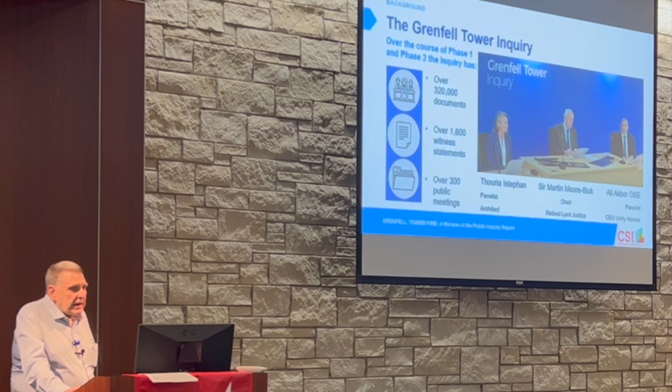Almost immediately after the fire, the government created the Grenfell Tower inquiry to examine the circumstances leading up to and surrounding the fire. It was led by a retired Lord Justice. This is kind of an equivalent to maybe one of the lower federal courts that feed into the Supreme Court, so Sir Martin had a pretty responsible job. There was an architect panelist, and there was a panelist who headed up an organization that managed public housing. So in addition to the comprehensive document discovery, the panel received witness testimony from everybody involved: the contractors, the manufacturers, the designers, the suppliers, local authorities responsible for the day-to-day management of the building, the government agencies, and most poignantly, the survivors of the fire.

Almost every survivor of the fire gave an individual testimony of what they experienced. The inquiry's stated goal was to answer the question: how could such a thing happen in a modern building in a technologically advanced country?

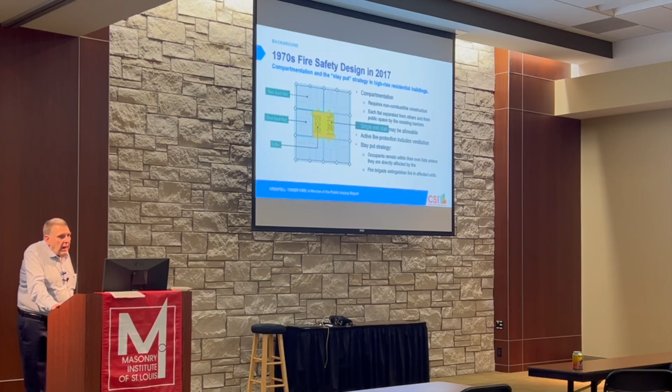So when the fire occurs, all residents not directly affected by the fire are urged to stay put. If you're not on the floor the fire's on, you are essentially in a fire safe box, right? And you stay put until the fire brigade extinguishes the fire or determines that it has spread to the point where you're in danger and need to get out.

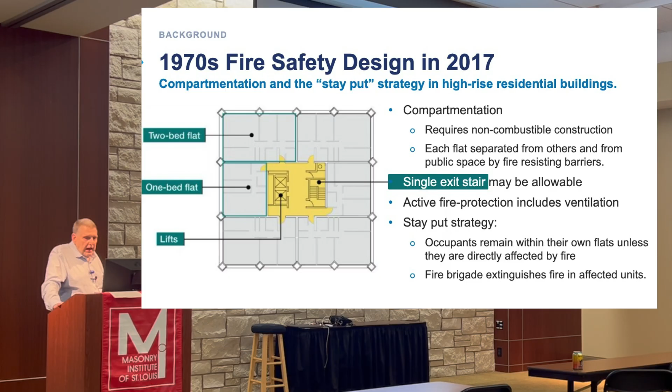Since there was no large-scale evacuation, firefighters were unhindered in using the stairs to move about the building. And you'll notice there's only one stair. Looking at it from our modern eyes, we say, well, how can a one-stair, one-exit building be safe?

After looking into this, I'm convinced that it actually worked. And one of the reasons I'm convinced is that there were hundreds or thousands of these buildings in the UK. And prior to 2000, which was the latest date I could find, there were no fatalities reported attributable to stay put.

Does anyone want to guess how many fires the London Fire Brigade fought in residential public housing units in London in the 12 months prior to the Grenfell fire? Make a guess. None? One. 12,000. London Fire Brigade answered 1,000 calls a month. Thank God the math was easy so I could figure this out, right?

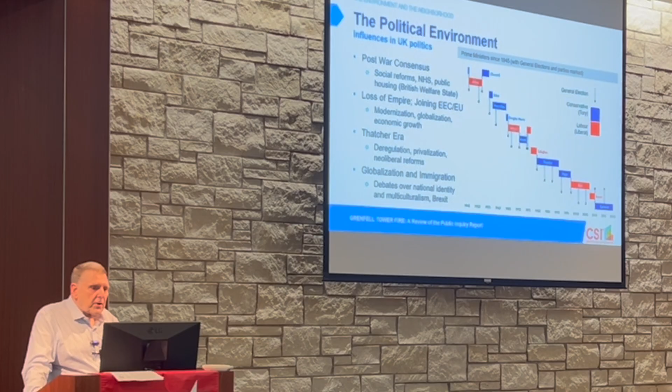This is a chart of politics in England after World War II up until 2020. And I'll point out that we do it backwards here. In our world, blue is our Liberal Party, red is our Conservative Party. The rest of the world does it the other way. So when you see red, you're seeing the Liberal Party. When you're seeing blue, you're seeing the Conservative Party.

So after World War II ended, Churchill was voted out, and the Labour Party came in. And there was a big push in England to rebuild and to provide housing, education, health, and welfare for the well-being of all citizens. This is where you had the big social welfare state develop.

The loss of the empire had been going on for a few centuries. We actually started it here, right? Didn't we, in 1776? I think we were the first of the colonies to sort of say we don't want to be under England anymore. And it had been accelerating, and after World War II, it really started going.

So this Imperial England is winding down, and England turns to a revitalized Europe in the years after World War II as a trading partner. When Maggie Thatcher comes in, in 1979, she brought along neoliberal reforms and austerity movement, and she privatized a lot of what was going on. Her policies reshaped British politics and ended the post-war consensus.

For the last 2 decades after Thatcher, the political debate in the UK, like other parts of the world, has been more contentious, and it's centered on immigration, nationalization, and Brexit.

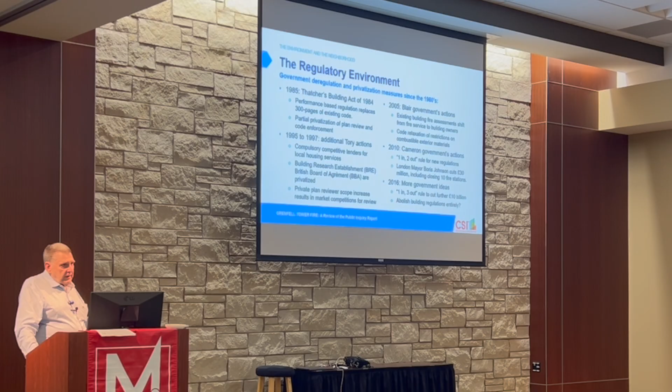This directly affected the regulatory environment. Thatcher had the Building Act passed in 1984. Building codes are now called approved documents. Requirements are replaced with the word guidance, so builders and architects are given guidance. Private code consultants are allowed to compete with local authorities economically to review and approve construction documents.

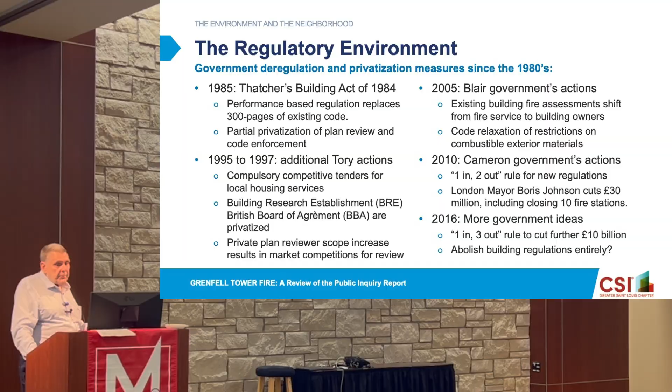So if you're an owner or an architect, you have your choice. You can go to the county government or the council government plan reviewer, or you can hire a private consultant. And even when the Labour Party gets back in with Tony Blair, it's not a reversal. Tony Blair is not a particularly liberal person, right? He's carrying on much of the same stuff.

He's relaxing the restrictions on combustible exteriors. He's allowing building fire assessments instead of being done by the fire brigade. Now it's done by building owners. So you're doing your own assessment of fire safety for the buildings that you manage.

Blair introduces a one-in, one-out rule for Parliament—I should say Blair's government. So what that means is for every one new regulation you want to pass, you have to take one regulation out. As the Tories get back in, this becomes one in and two out, or one in and three out.

During this time, London Mayor Boris Johnson cut £30 million, including closing 10 fire stations in London, one of which was the North Kensington station, which literally was within walking distance from Grenfell Tower.

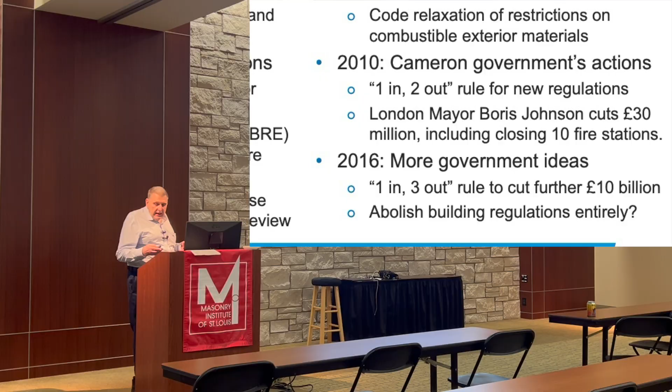And finally, a member of Parliament stood up on the floor of Parliament and said, are we at the point where we should entirely abolish building regulations? Essentially, let's get rid of the code. Well, that didn't pass, but that kind of gave you an idea of what was going on in this time frame. This is 2016. 2017 is when the fire happens.

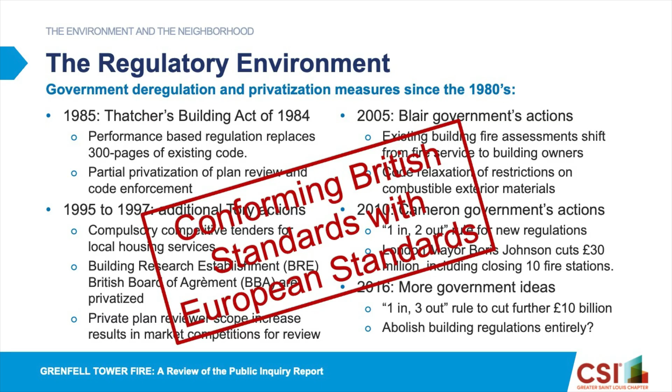While all of this is going on, this timeline, we have a UK that in the beginning is conforming with European Union standards, because don't forget they're becoming trade partners. The UK joins the EU. This goes on for a while, and toward the end of this time period, now we're facing Brexit. So all this work toward combining leads to thoughts of, well, do we really still need to do this? Should we separate our standards? A lot of confusion and so forth, right?

Actually, before I did this at the end of the slide, but I want to do it at the beginning, talking about the culture and the history of the UK. Anyone want to guess who the very model of a modern Major General is here? Sir Milton Grenfell? Very close. You always get them right. Actually, it is Field Marshal Francis Wallace Grenfell, the first Baron Grenfell.

The history of England is a history of contrast. There's an obvious pride in being the power, being the empire for many, many years, in the culture and the history, in advancing science. This also comes with a break between the classes. There's a lot of racism, and the whole sort of colonial approach is really a tarnish on the record of the English Empire. London becomes the seat of a great empire.

London is the greatest city in the world. Time starts in London, right? At Greenwich—that's where time starts. That's the kind of influence that London had. Even after the empire started to wane, the Industrial Revolution took place, and then you started to see a growth in banking, manufacturing, insurance, and so forth. And then later on, it's still in a very important location, attracting even today global talent and investment.

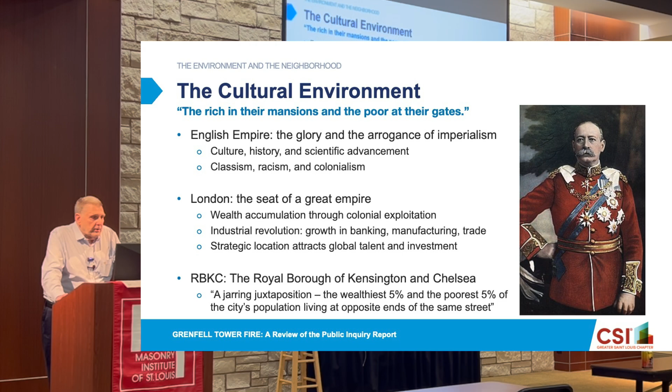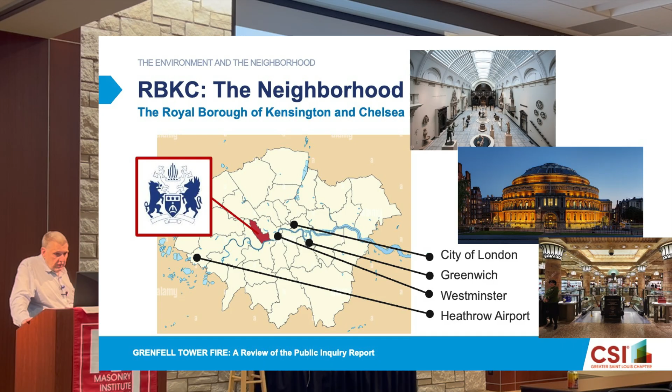So just to give you a context, giving you a couple minutes on 2,000 years of English history—Kensington and Chelsea are really affluent neighborhoods. It's the Royal Borough in memory of Queen Victoria, who was born at Kensington Palace. She established cultural and educational institutions, the Victoria and Albert Museum at the top, Royal Albert Hall in the center. And as a result of that, high-end shopping areas developed. The bottom is Harrods department store. None of us can afford to buy a suit there.

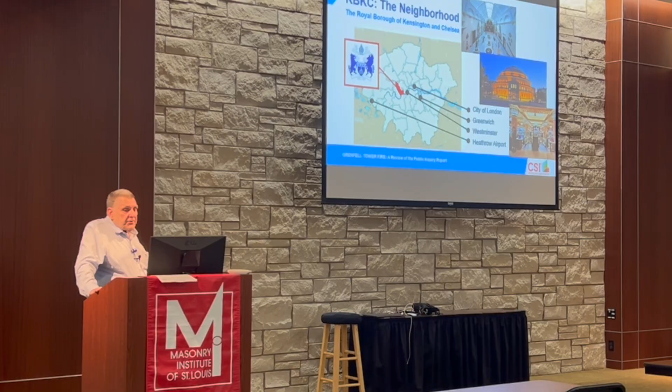The borough also has rough areas, including North Kensington. North Kensington has a long history of crime and drugs and violence, particularly in the public housing. The borough also includes gentrified areas like Notting Hill. Notting Hill was the site of serious race riots in 1958. Right now, if you wanted to buy a one-bedroom apartment in one of the buildings that was the site of those race riots, you'd pay over £1 million. So all this is kind of going on in this relatively small part of London.

Public housing in the UK is not the same as it is here. Are any of you surprised that currently 17% of the population of the UK lives in public housing, but in the US only 2% does? Is that unsurprising to anyone, or is that surprising?

Further surprising is that at the maximum, after World War II, the UK had 35% of their population in public housing. The maximum for the US ever in our history is 5%.

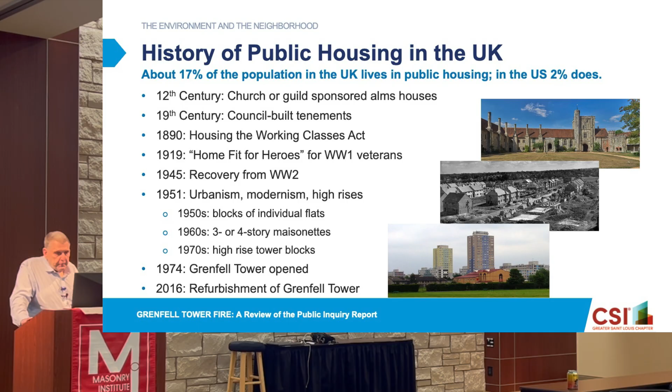So the roots of public housing go back to the 12th century. The councils built the first tenements in the early part of the 19th century. By the end of the 19th century, the national government starts to kick in some money.

World War I and particularly World War II really amp it up. Homes fit for heroes after World War I. And after World War II - I mentioned the Blitz before - the Blitz destroyed 1.2 million homes in London. So that's the kind of housing crisis they were facing.

The middle photo there is kind of the housing you would expect in this before-and-after World War II period - low rise, kind of like our suburbs. As you get to the 1960s, you get these 3- and 4-story multi-unit flats. And in the 1970s, you end up with high-rise towers.

So the neighborhood where Grenfell Tower is, is much like the photograph at the bottom, where you have this combination of medium-rise and high-rise buildings. That's when Grenfell Tower started - it was opened in 1974. It was refurbished right before the fire, in 2016.

Grenfell Tower is part of the Lancaster Road estate. In 1963 and '64, a slum clearance and redevelopment program proposed a new community with 3 mid-rise housing blocks leading to a 24-story concrete tower. The early plans included amenities like shops, offices, a swimming pool, and gardens.

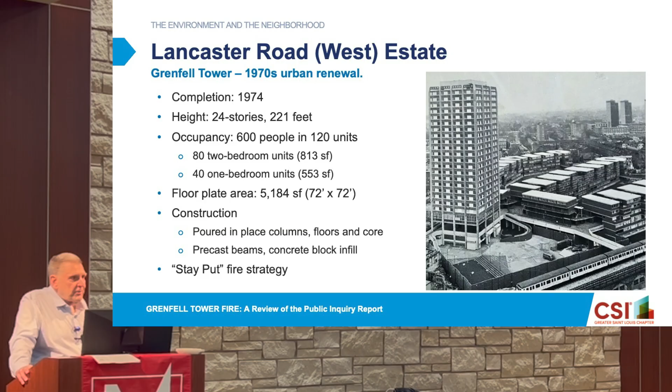Okay, you know what happened - they were cut because of budget. So all that was left was essentially the housing. Still, a very vibrant neighborhood grew up, mostly North African immigrants.

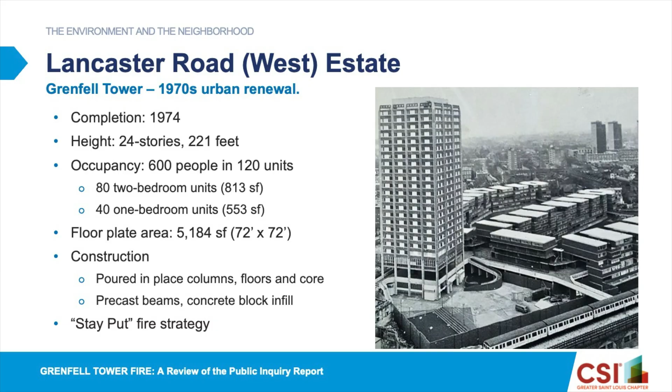Just 5 years after the tower opened, residents were complaining about vandalism, broken lifts, and lights. By the mid-'80s to the mid-'90s, this was among the toughest public housing projects in the world. Picture the States and what our public housing was like in the 60s and 70s here - that's what you would find right here on this site.

But by the mid-2000s, the area had stabilized. There were still people who survived that rough part and were still there. In greater North Kensington, you have a lot of wealthier people coming in because you're right on the border of the wealthy parts of Kensington.

In 2008, a movement in the Royal Borough started to meet a shortage of housing and school space for its growing population at both ends of the economic spectrum. So after several months of study, the site of the existing Kensington Sports Center was slated for demolition, and that was chosen as the site for a new school and a new leisure center complex.

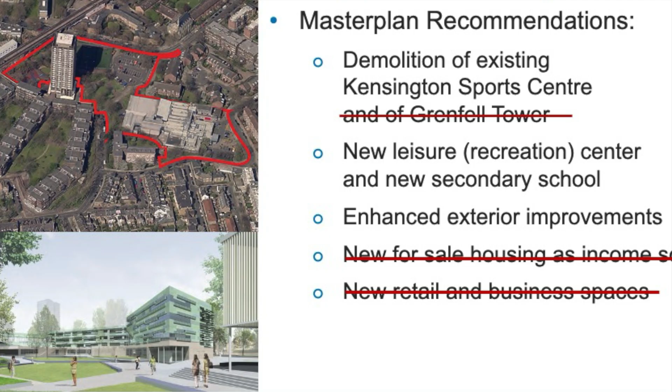You've got the red line now, with Grenfell Tower still standing there in its shoddy, brutalist concrete shape, right next to this new thing that's going in. And you can see the architect's rendering of the school.

And in the back, those sort of cloud or tree-looking things - Grenfell Tower is actually hiding right there. I want you to keep in mind the way the architect rendered this.

Obviously, people don't want an ugly-looking building there. People thought of it as a sore thumb. I even found one quote where they said, instead of a sore thumb, it looked like a middle finger to our new project, right? So they found the money to clad the outside of this public housing building.

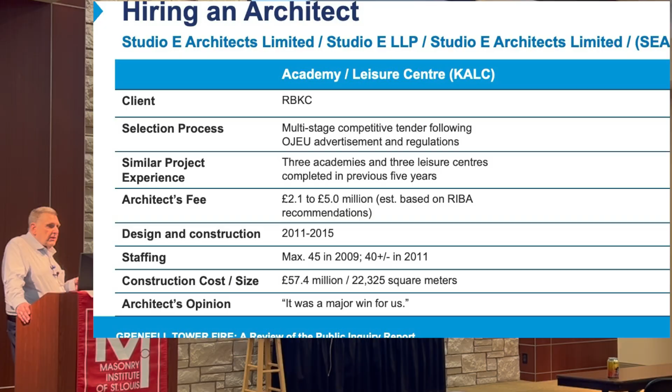And make it look more acceptable to the wealthier people moving in. So we've got two things going on. We've got the Kensington Academy and Leisure Center, or KALC. And then later on, we're going to look at the recladding of Grenfell Tower.

The council, the RBKC, is the client for the Leisure Center. They solicited an architect through the EU's competitive tender. OJEU is the official journal of the European Union. So they have a bidding standard that has to be followed.

The architect, Studio E Limited, is vastly experienced. They are an exceptional architect. They've done 3 academies and 3 leisure centers in the previous 5 years. They are award-winning. The principal in the hearing testified that there were only a handful of other firms in the UK and on the continent who could compete with them. And he was right, okay? This is a good marriage, an excellent architect, and at the bottom, it was a major win for us.

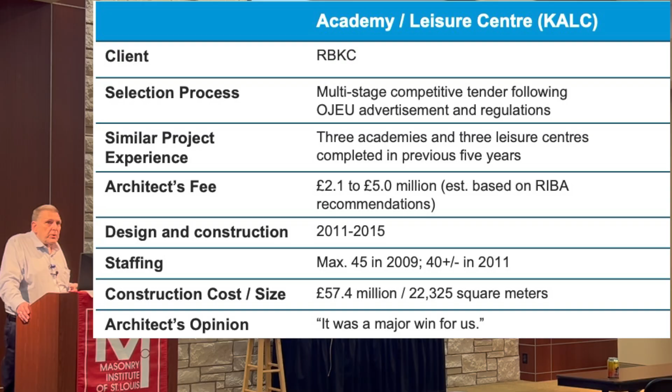5 years later, we're going to be cladding Grenfell Tower. The client role goes to the tenant management group, KCTMO. They are a contractor to the RBKC. They decide they want to hire the architect without direct competition. They manipulate the process to avoid the tender rules of the OJEU.

The first fees that the architect wanted were essentially cut in half. They also manipulated a way of getting more money to the architect. So this is bad. I mean, obviously you shouldn't do it.

What's probably worse is Studio E architects had no direct experience in high-rise residential, in occupied buildings, or in recladding the exterior. Not only did the firm not have that experience, no member of the firm had any experience. So essentially, they hired an unqualified architect.

Also note at the bottom, for the school, it was a major win for us. For Grenfell Tower, the tower is a poor relative of KALC.

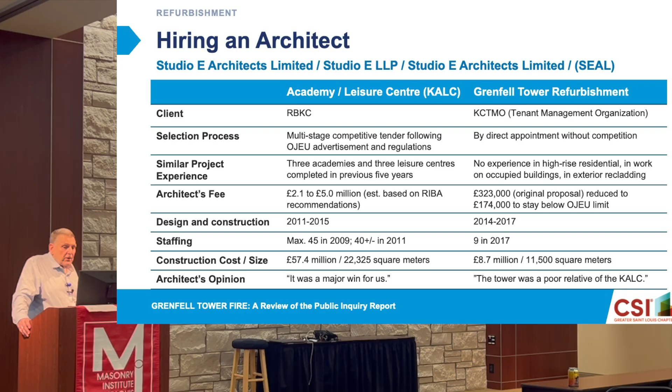Also, what's going on at this time, you notice there's 3 or 4 different names at the top for the architect firm. They are in financial trouble. They're going through different ways of incorporating themselves, of structuring themselves, and then look at the staffing. 45, less than 10 years later, 9. So this is a firm that's in trouble.

The project brief, we would call that a program, starting out with improving the public realm, improving office space, and then you get to overcladding the tower, including windows for energy efficiency. That's near the bottom of the list, not for appearance. Although this probably was a hidden motivation, it's nowhere stated that that's why they wanted to do it.

The architect is mainly interested in the ones I have outlined in red. Improving the public realm and overcladding the tower.

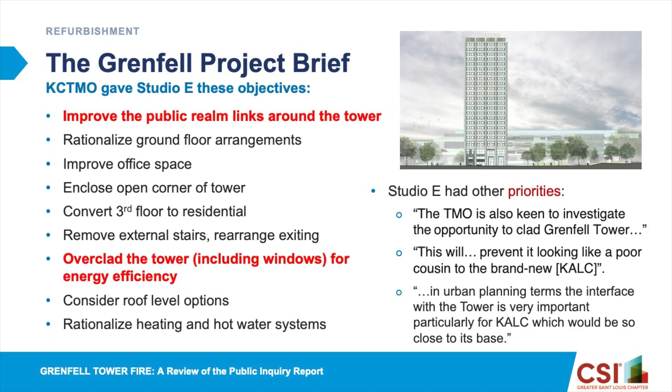And the reason that it's important, and this is from the testimony, these are emails between the project manager who had been at a meeting, the first one he's sending to his boss on the train back, saying that the TMO is eager to investigate the opportunity to clad Grenfell Tower. The principal is giddy. He says this will prevent it looking like a poor cousin to our project, our important project.

And then later on in a published statement that the firm made, in urban planning terms, the interface between the tower is very important, particularly for KALC, which would be so close to its base. So I think there's no question that the focus of this firm was on the bigger job and not on the smaller one.

The expert who testified was talking to the attorney, the Queen's Counsel, prior to going on and testifying, and he's explaining to her what this means, and he says: this doesn't burn.

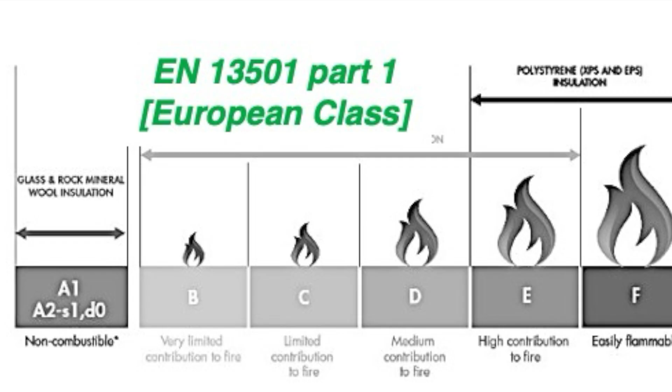This is very burny, and then there's steps down, right? So this term 'very, very burny' was actually used by the attorney, and I think it kind of embarrassed the expert, but we're going to use that as well.

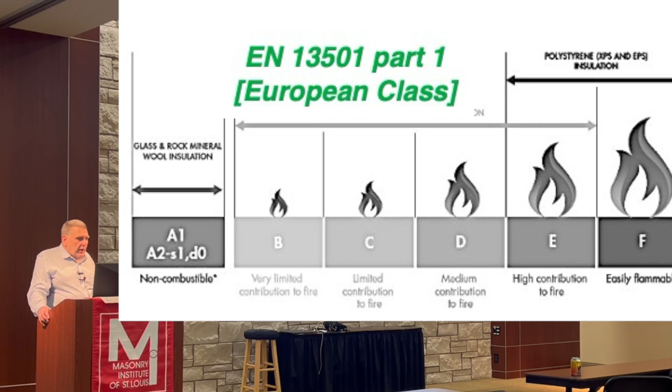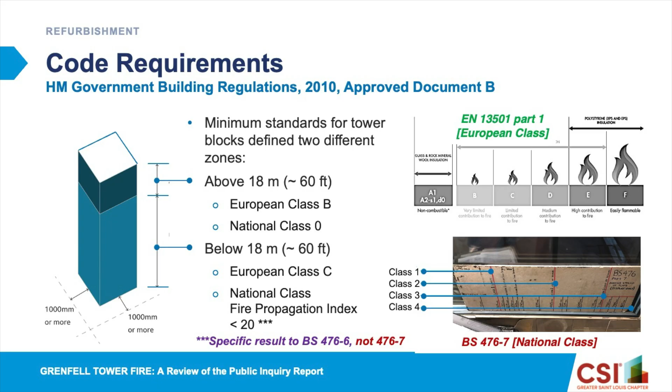So this slide gives you an idea of how mixed up things are at this state in time with the regulations.

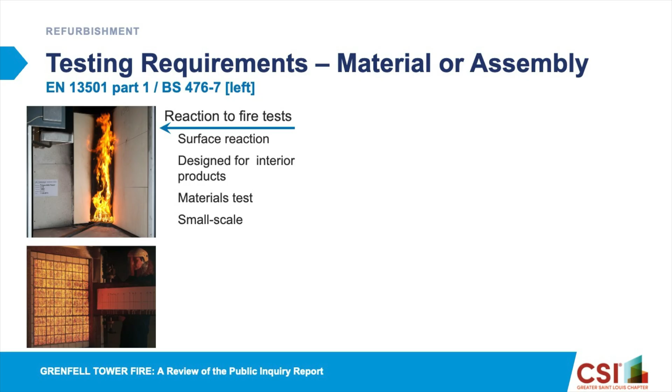On top is the EN test from Europe, and on the bottom is the British standard. The European test is vertical - there's a gas flame at the bottom, and the rating is based on how far up the flame burns. The British test uses a radiant panel. The important thing to keep in mind about both of these, despite the fact that they're trying to rate materials for the exterior of the building, is that these are interior tests.

These are similar to the Steiner tunnel test, the ASTM E84 - am I right, architects? That's the right number. Yeah, basically that's the one we use for testing carpets and wallpaper for flame spread and smoke. Did I remember my spec writing? I'm getting nods from guys and gals that know. Thank you very much.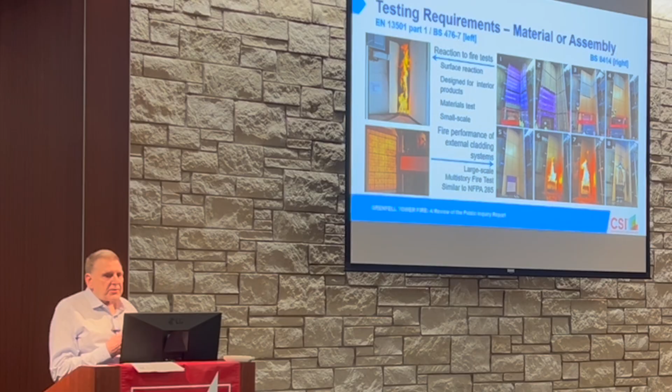This is the multi-story fire test, NFPA 285. Well, it really isn't - it's the British standard version that came into effect in 2002 and 2005. This is an assembly test, a full-scale mock-up, several stories tall.

I want to point out the fire tech here on this first test - this is 6 feet, so that's human scale. Look at the people over here, right? These are bigger tests of what's actually going on the wall, not material tests - they are tests of the entire assembly. Big difference.

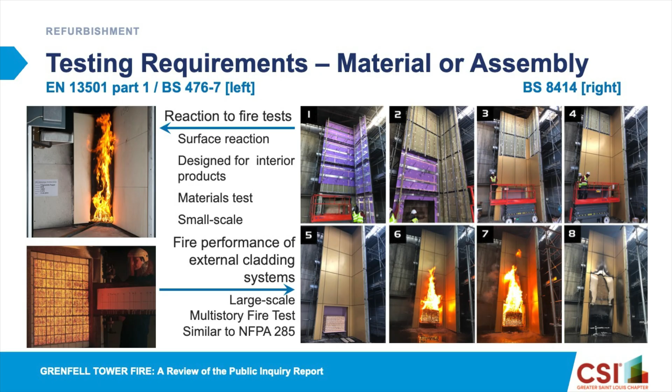Studio E in the material selection process first wanted solid zinc panels and mineral wool, and the main reason was that it matched or was compatible with the school - that was their whole focus. You can see here that for the next 2.5 years there's a back and forth, a stop and go.

Cladding fabricators are brought in and suggest aluminum composite materials. The MEP consultant says there's no way mineral wool is going to give you the R factors or U factors you need - you need to go to polyiso. The contractor comes in and brings in a facade consultant, who says it's going to be ACM - that's what everybody's doing. They end up going out to bid with zinc panels and polyiso insulation.

Rydon wins the contract, and then they come back with revisions to their bid to meet the budget, going to a cheaper panel. A mock-up is installed with a fire-resistant core and face-riveted mounting. The architect insists on cassette mounting, and during construction we get the Arconic ACM cassette and the Celotex polyiso. All these words that non-architects may not understand, we're going to explain as we go through.

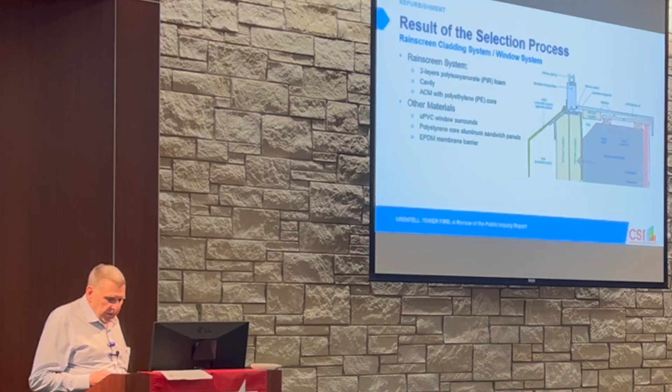As a result of this process, we end up with this detail for the cladding system at the window. We have 2 layers of polyiso foam, a cavity, a rain screen system, and aluminum composite material, ACM, with a polyethylene core. There are other materials I haven't mentioned: an unplasticized polyvinyl chloride window surround, polystyrene cores in the window sandwich panels where you don't have glass, and an EPDM membrane.

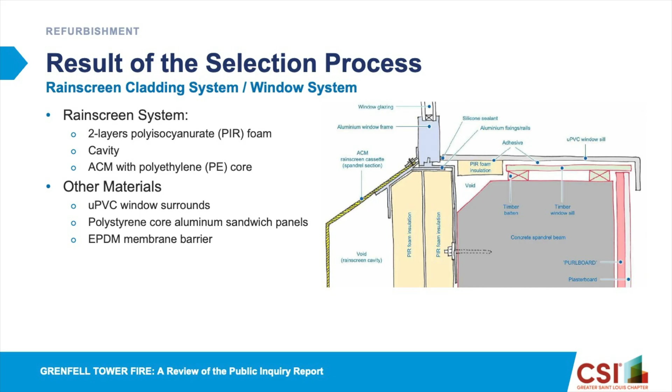The expert on the way materials burn testified that if a fire is ignited in a cladding system made of these materials, we have to expect it to spread quickly and catastrophically. Any competent fire professional should have been aware of these dangers.

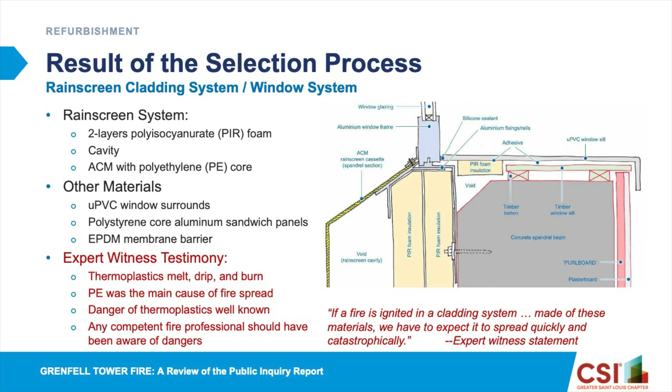Aluminum composite materials are made of a plastic core in the middle and metal on the outside. Architects loved them when they came out because they wouldn't wrinkle. They were nice, clean, smooth, great looking panels.

There are 2 ways this particular product came: in a riveted system and in a cassette system. The riveted system up at the top is essentially flat panels face attached to the framing. Any real architect hates this, because we don't want to see the bolts, the rivets. So they came up with a cassette system where you take a flat sheet and fold it - you can see it's folded and tucked back and the fastening is concealed. The way they fold it is by cutting a V groove into the panel, which allows a nice, crisp 90-degree bend.

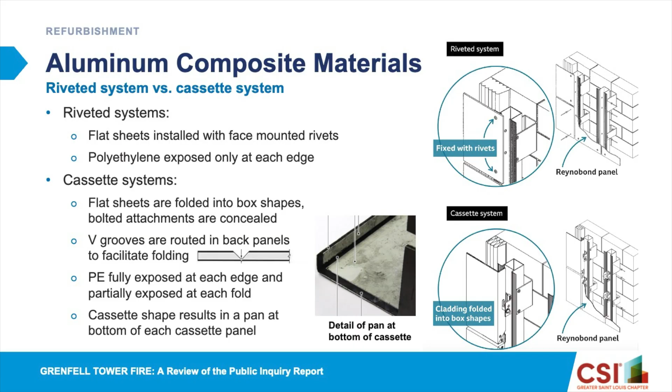The problem is that the polyethylene is exposed at each end of the panel and at the folds, whereas on the riveted system it's only exposed at the edges. That's why the riveted system passes the fire test, and the cassette system doesn't. I'll explain why this is true - I know things have changed here.

So the Arconic Reynobond polyethylene ACM was tested several times. Arconic in Europe misled the British Board of Agrément, the people that give you the certificate that you passed. Arconic submitted test reports for a specific configuration to obtain a general suitability certificate. Their riveted systems passed, their cassette systems did not. Their fire-rated systems passed, their PE systems did not. And interestingly - I'm going to ask Matt afterwards if he knew this - color differences matter. Have you ever heard that?

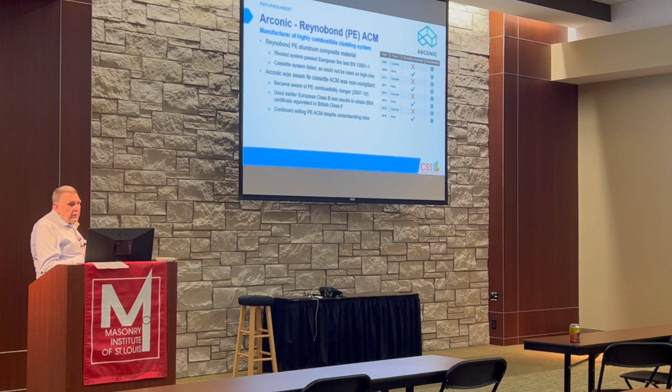I was stunned that when they were testing, certain colors would pass and certain colors wouldn't in the same type of test. Look at what happened here: every one of the cassette tests ended up with an E - as our expert said, very burny. The riveted systems had multiple results. The problem with this chart is it doesn't necessarily show the same product tested, so they ended up with some B tests and some C tests. Remember, C works below 18 meters, B works above. They got this BBA board, now private, used to be a government board, to certify that because they passed a certain test back in 2006 or 2011, this product in general would work for any high-rise building.

Despite knowing it was unsafe, senior managers at the firm did not withdraw the Reynobond 55 PE from sale. The inquiry says Arconic thus promoted and sold the product knowing that it presented a significant danger to those who might use it. Arconic's marketing manager in 2007 attended a seminar of the metal industry and learned about the risks of ACM. The speaker ended the seminar by saying that a polyethylene ACM panel contains the same fuel power as an oil tanker truck, and his concluding remarks - this is 2007 - what will happen if only one building made out of PE is on fire and it kills 60 to 70 people?

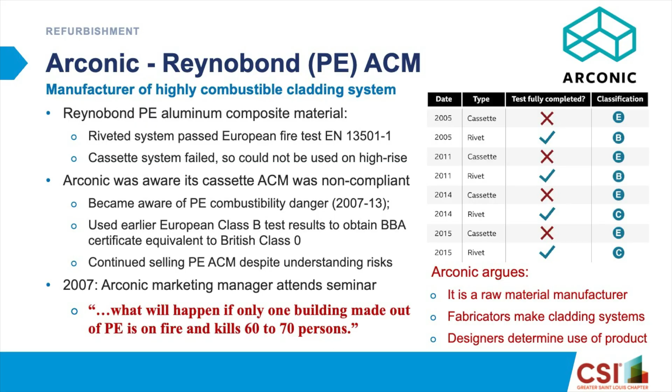Kingspan was actually only 5% of the insulation, and I'm doing them first because the inquiry called them deeply entrenched and persistently dishonest. They marketed their K15 insulation for buildings over 18 meters between 2006 and 2019, knowing that it was a flammable material.

They created a spurious market for polymer-based insulations for use on high-rise buildings. The British Board of Agrément and the local authorities were criticized for not rigorously examining the product, and they actually inadvertently facilitated the dishonest marketing that Kingspan did. Kingspan essentially had the lion's share of the market.

Their response is that we didn't know K15 was used on Grenfell because it was put in when there was a shortage of the product you specified. Your expert said that the K15 didn't cause the fire, and the report actually stated that the type of insulation was immaterial. Well, this was one expert. There was other testimony countering this. But the reason Kingspan is in there and gets such a bad reputation is that they essentially created the market.

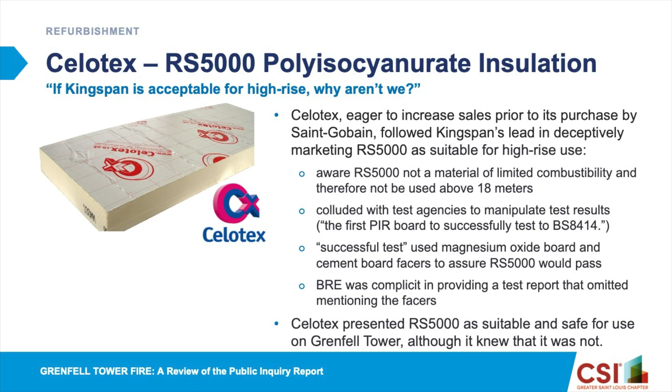Their people looked at Kingspan's literature, and they went to the same testing agencies, former government testing agencies that have now been privatized, and said, how did Kingspan do it? And essentially, the testing agencies told them how to pass. The way that

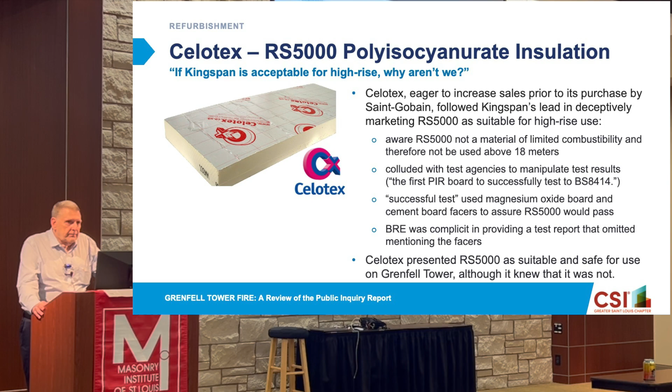Celotex and Kingspan both passed their multi-story fire tests was that they tested an assembly that had cement board on front and back. Right? Anything's going to pass that. So they ended up with a certificate that said this material passes the BS 8414 test, and they use that to market.

Well, the fallacy is that test is an assembly test, and every time you do a different assembly, you have to do that test and get it passed. Celotex says the system shown in our sales literature was tested and met the safety criteria, which was partially true depending on what year you were looking at, what they were marketing. Grenfell was substantially different to what we had in our sales brochure, and design decisions are made by construction professionals.

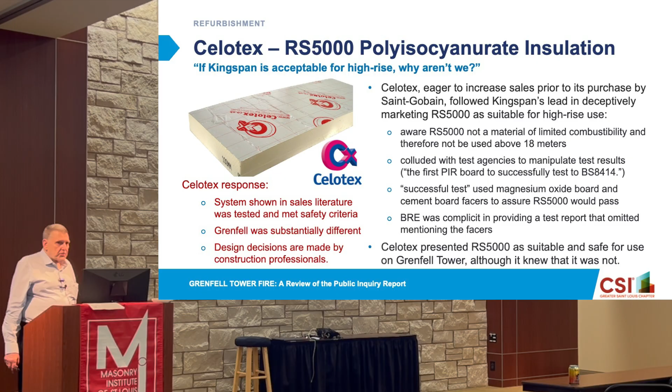Another expert looked at the paths of fire and identified 6 possible paths: vertically up and down the columns, horizontally across the ACM spandrel panels, horizontally along the window head and sill, vertically along the edge of the windows, through those very burny aluminum sandwich panels with polystyrene core.

I also didn't talk about, and there's a whole section on cavity barrier and fire barriers. They're specified by code. Essentially, it's an intumescent strip in the case of one, and in the other it's a non-combustible strip. And I think we still have something in our code like that, that the fire break versus fire stop, right?

This thing here, at the very tip of that point, there was nothing. There was a complete void that went all the way up the building.

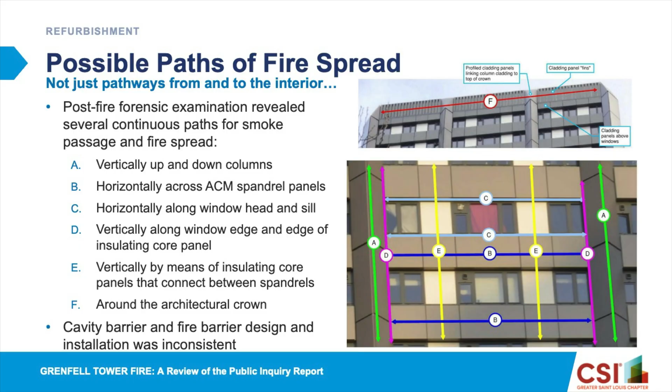I can't begin to tell you my anger, disgust, and depression at how many people involved in all aspects of this project testified that they had no idea how dangerous this cladding was until the day of the fire. Those of us who've been in the business for years, coming to seminars like this, learning about the multi-story test, the NFPA 285 test, it's been what, 20 years?

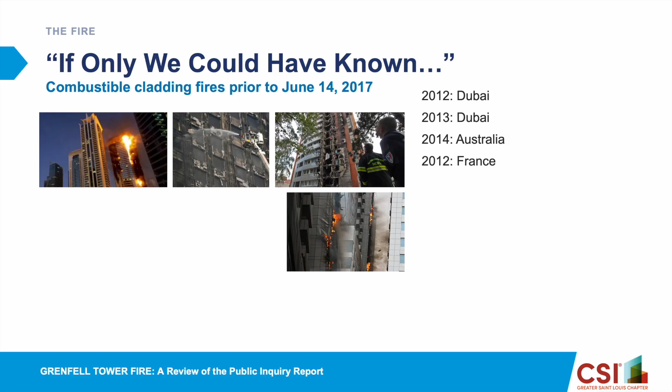If only we could have known, but we did know. If we had been alert, we would have seen news stories about fires in different parts of the world with combustible plastics, not necessarily all ACM, but all with combustible plastics on the outside of buildings.

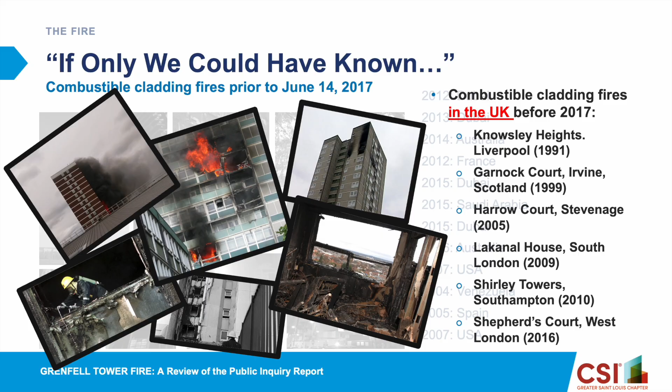And the clever ones among you are saying something's missing: combustible cladding fires in the UK. None of those were in the UK. I found 6 of them that occurred before 2017. What they have in common: all were housing projects, all had combustible plastic exterior products, a couple of them ACM. Each one of these 6 fires resulted in a public inquiry, not to the extent of the one at Grenfell, but a public inquiry. And 5 of the 6 inquiries recommended that flammable plastics be banned from high-rise buildings.

Parliament never passed this rule. From 1991 to 2016, they were told time and time again that they needed to get this out of the code, and they never did it. Why is that? Don't forget about the 'one in, one out,' 'one in, two out,' 'one in, three out' rule. The government just couldn't get past that. They couldn't figure out how to get a needed law in and trade off something else for it.

The fire started early in the morning. The tenant, Mr. Kebede, was sleeping in the living room, became aware of the fire, left the room, and woke up his two suitemates. They all left the building, and on the way out he shut off the main breaker to the power. How many of you, in the midst of smoke and flame, would have thought to do that on the way out?

Anyway, they go out. He calls the fire department. Fire trucks arrive 5 minutes after the call. So while I did slam Boris Johnson a bit for closing the fire station, I don't think that made a significant difference in the fire department getting there.

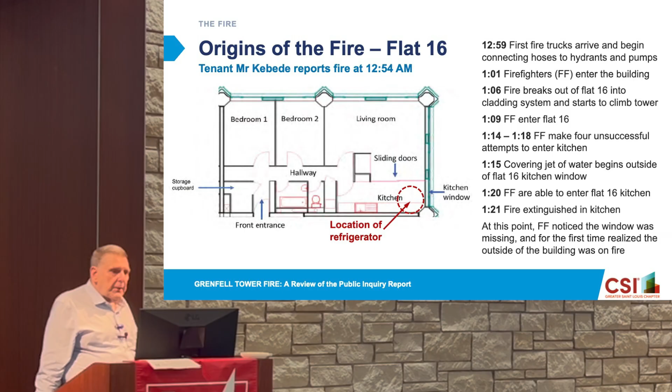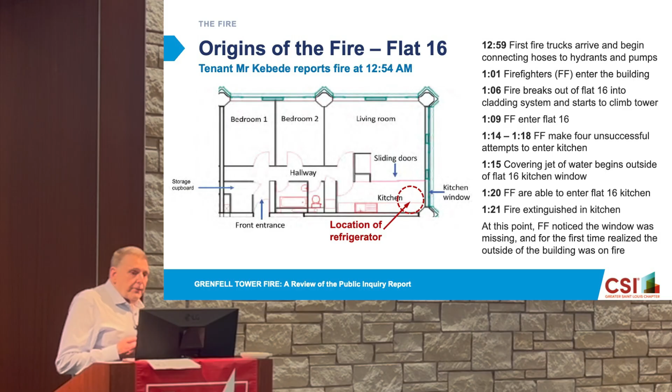Firefighters enter the building. Five minutes after they enter, the fire breaks out of flat 16 and onto the exterior. But the firefighters on the 4th floor don't know that because they're on their way up, so they have no idea what's happening outside the building. They come in through smoke, in their breathing apparatus and suits, with night vision goggles.

They have to check all these rooms to make sure there's nobody in them, because they're saving human life. They finally get to the kitchen at 1:14 and make 4 unsuccessful attempts because they can't get into the kitchen. They're surprised, because they put out fires all the time, right? A thousand calls every month. They've done this before. But they can't get in, they can't get in, they can't get in.

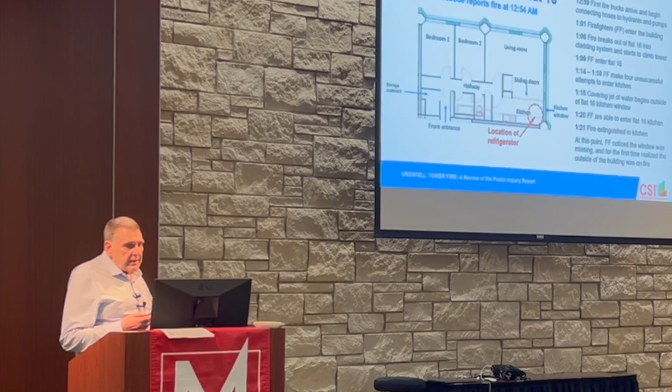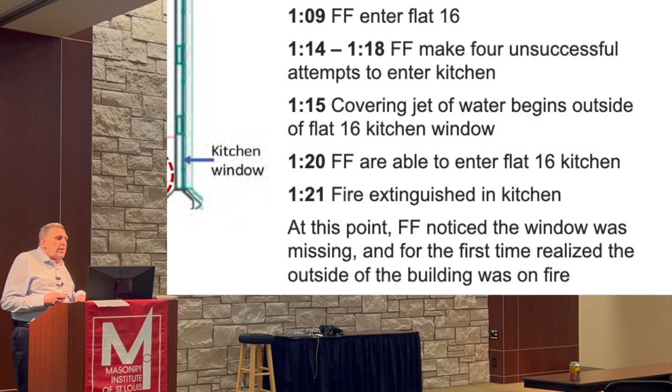Finally at 1:20 they're able to get into the kitchen, because at 1:15, from outside the building, they put a covering jet on the flames outside. In one minute the fire's put out, so they've done the immediate task they were supposed to do, they put out the fire. Then they notice the window is missing, and there's one hell of a fire outside, and they're shocked.

Fire spreads really well upward, doesn't spread as well horizontally, and hardly spreads at all downward. The expert explained that when a piece of wood is on fire, the wood itself doesn't extend the flame as it burns. What happens is the flame heats the wood, and the wood produces flammable gases and liquids out in front of the edge of the flame. The flame ignites that gas, and that's what keeps the fire burning.

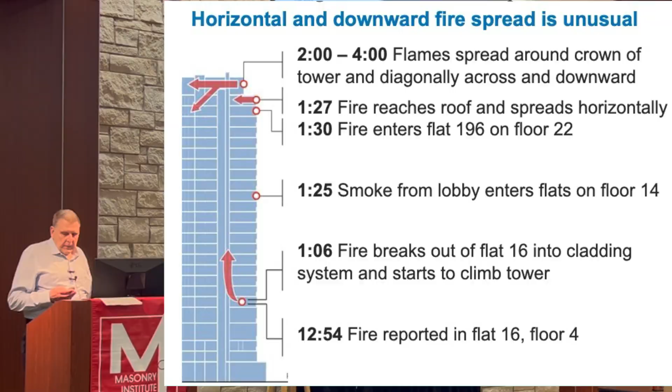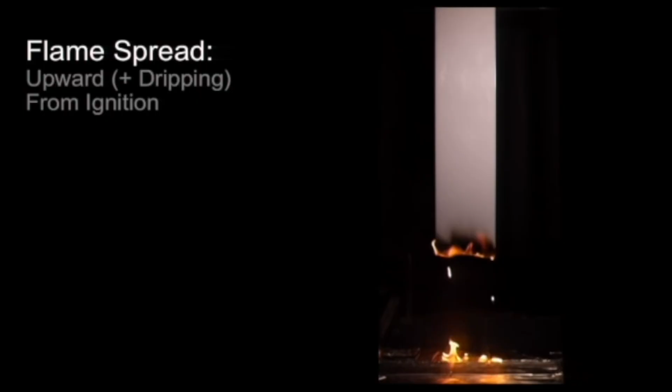Now, what about the pathway down? Well, the expert who put this together has a piece of PE-ACM. There's a pan at the bottom down here that catches drips. And you're seeing drips of liquid flame coming down and catching in that fire.

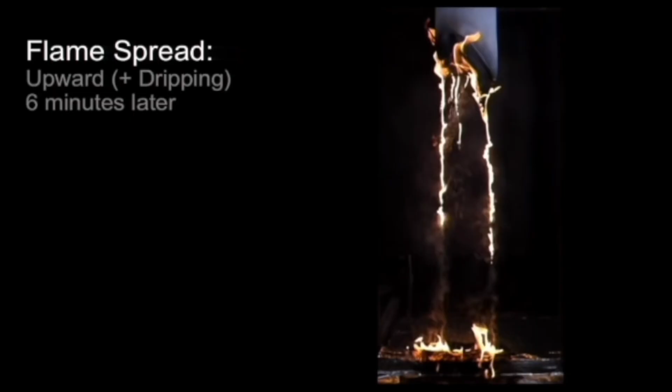Now we're 6 minutes later. The panel is completely engaged, and now you have rivers of flaming, burning polyethylene dripping down. And even in this next clip, you get to the very top and you think, man, this has got to burn out, right? Look at what happens now.

The expert was keen to point out that this is not a scientific test, it's a demonstration. And I think it's a pretty good one for lay people like us. We're going to look at the fire. I've just taken clips, very short clips, as the fire sort of burns through. So we'll take a look at this. I'll do a little bit of commentary.

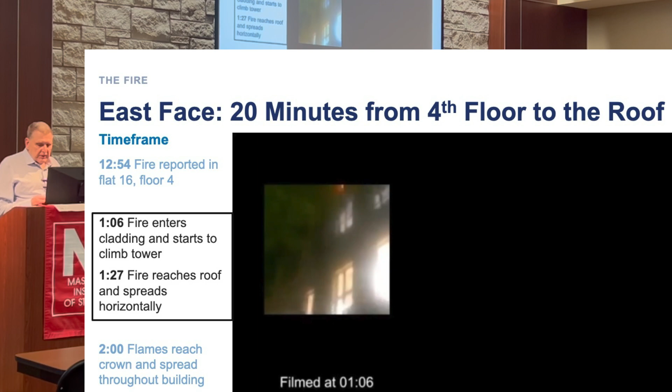Filmed at 1:06, you can see Mr. Kebede's apartment. The fire's still inside. At 1:11, you're seeing it start to break out. This is right about when it starts. Here we are about 6 minutes later, and this is still a maintainable fire. You can see they've got the outside fire streams going now. If they had an aerial pump, it's possible the fire could have been put out, although that's complete speculation.

Here we are at the 14th floor, and you can start to see it burn. You'll start to see chunks of burning insulation, burning ACM panels dropping down, and finally the fire is just about to reach the roof, and then reaches the top of the building. And we start to see our horizontal spread.

20 minutes. So I put together clips of what we just saw and what you would see if I had gone on longer. This is what we saw. So here are other clips.

In the second clip, the fire's gotten to the crown, gone over, and now it's starting to come down. You can also start to see fire going into the building and coming out. In this location, they're speculating that the fire got into this unit and was burning up and down. You can see over here just horrible, frightening pictures of the building completely being engulfed and flames just engulfing the entire building. Finally, towards the end, they start to get aerial equipment out there, and they're able to get the fire, if not under control, at least moderate it until it finally burns itself out.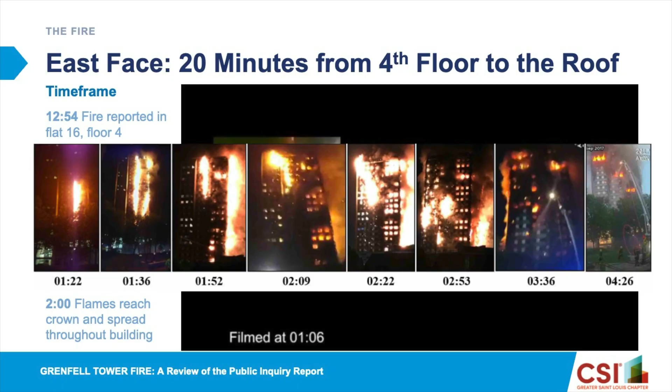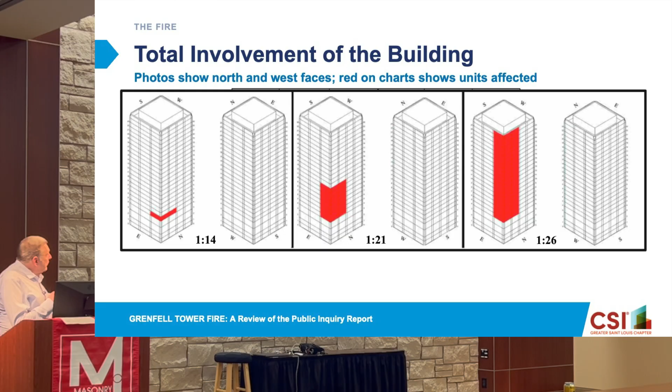They put together these charts. This is the time frame that we saw. You are looking at the east and the north side of the building, and the west and the south side. And this is not the exterior. This is the unit being consumed by fire. So you're seeing when each of these units was engulfed by fire from the outside, essentially burning in.

So we'll take this and move it up to the corner, and I'll show you the photographs that I had. And kind of by looking at them and looking at the number of units that are burned, you can see how this spread around the crown and down.

This tragedy resulted from a long chain of errors, incompetence, carelessness, and what the inquiry called a culture of noncompliance with fire safety rules. In some cases this resulted from an inexplicable ignorance of building regulations by our brother and sister design professionals. There was a widespread failure among all parties to take responsibility for important aspects of the work that affected fire safety. Most alarmingly, the inquiry discovered evidence of dishonesty and fraud involving corporations who manufacture the building products and the testing agencies charged with certifying compliance.

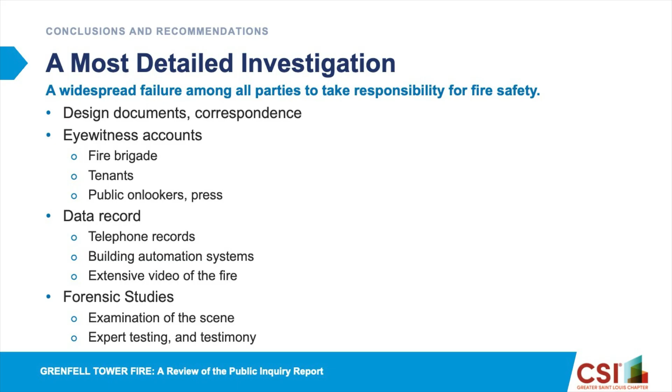This is probably the most detailed and documented and thoroughly understood fire disaster in history. The inquiry itself cost about 180 million pounds. You can see the evidence and testimony.

This is Martin Moore-Bick, the chair of the committee, saying that for us as an industry to provide the services that we should provide as reasonably competent people, we need to be competent to carry out our functions, and we must exercise reasonable skill and care in doing so.

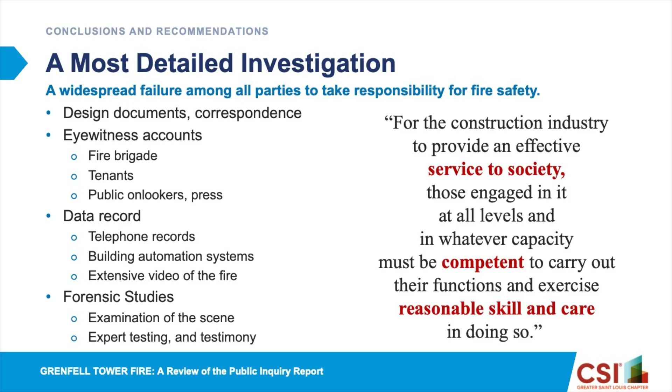Studio E Architects, as I said, was award-winning, had a notable record, but no experience in projects similar to Grenfell Tower. The inquiry was clear that Studio E had a shocking misunderstanding of their responsibilities as an architect.

Code, health, safety, and welfare, material choices - they had little interest in assuring that the materials they did select were safe. Their main concern was transforming the look of the tower so as not to detract from the Kensington Academy and Leisure Center. They failed in the technical side of architecture, but also on the business side.

They were in financial trouble for several years. They had a great loss of staff, so they had younger people doing things that they probably shouldn't without sufficient supervision. They were lax about making sure that people acquired their CEUs. They were confused about the responsibilities that they had. The principal was not directly involved, and they had inexperienced staff making decisions.

Studio E failed to meet the standards of a reasonably competent architect and therefore bears a very significant degree of responsibility for the fire.

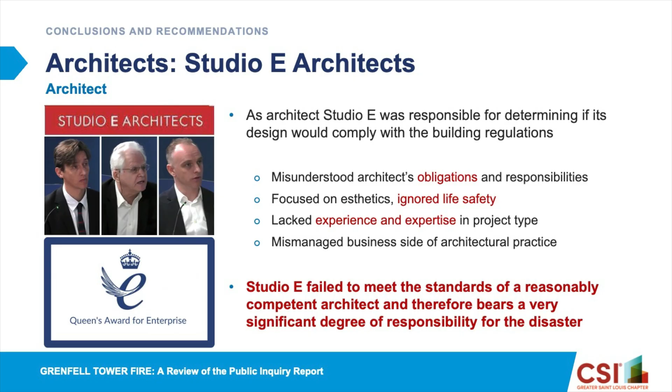Exova is a leading provider of technically demanding testing and advisory services. They employed 4,500 people in 121 laboratories in 32 countries. They are definitely the A-team for doing studies about fire.

Exova made no analysis of the original fire strategy from 1974. They made no examination of the existing building, no site visits, and they had no final fire strategy. They did not address the exterior wall design.

I'm going to read you a quote from their first draft that was reviewed: 'It is considered that the proposed changes will have no adverse effect on the building in relation to external fire spread, but this will be confirmed by an analysis in a future issue of this report.' Keep those words in mind, because those same words appeared in the next issue of the report, and the next issue of the report, and the last issue of the report, which, by the way, was not the final issue because there wasn't one.

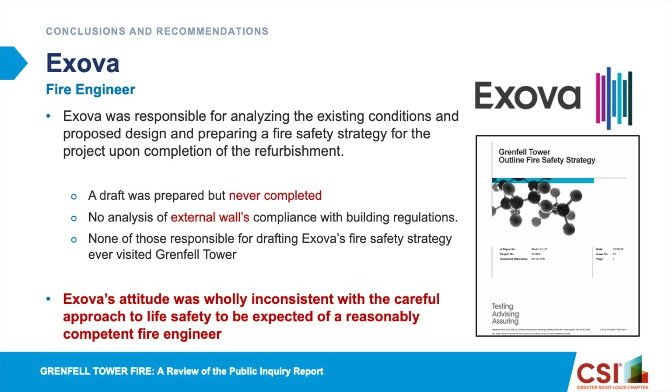Exova's attitude was wholly inconsistent with a careful approach to life safety to be expected of a reasonably competent fire engineer.

Rydon was the general contractor. They started out as a property maintenance contractor, then branched into facility management and into contracting. They won the competitive tender midway through the design process and became the principal contractor under a design and build contract - design build, we would call it here. Studio E and their consultants, including Exova, now worked for Rydon.

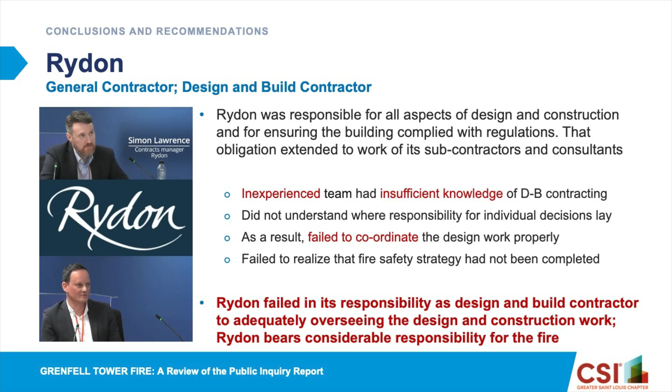Rydon's management had never done design build. They lacked the experience and knowledge to carry out their responsibilities. They saw their role as the traditional one they had been doing - scheduling and organizing - but not monitoring the safety and quality of the work. Rydon failed in its responsibility as a design and build contractor to adequately oversee the design and construction work.

They bear considerable responsibility. Harley Facades is the cladding contractor.

Harley Facades is the cladding subcontractor, very experienced. 1996 was when they were founded as a construction company. In 2002 they branched off into this external cladding company. You can see they were proud of Grenfell Tower - here's a brochure they put out in 2016, just before the fire.

They were brought on board during negotiations. They saved 327,000 pounds using a cheaper cladding and did not return the savings to the owner, but conspired with the contractor Rydon to cover Rydon's 212,000 pound budget bust.

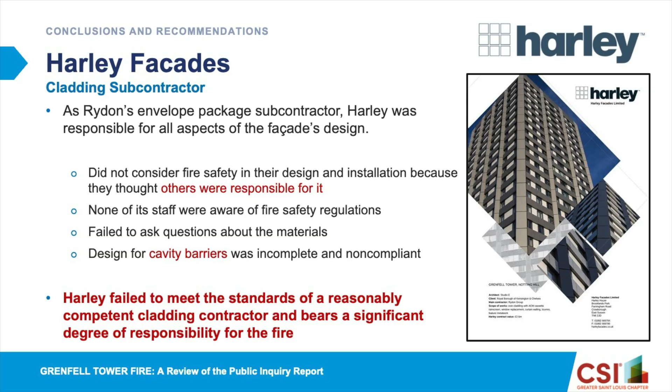Harley's owner's son was the project manager. This was his first full-time experience with Harley, although he had worked part-time during his time at university. His degree was in motorsport management. I don't know what that is, but I suspect it wasn't necessarily germane to running a construction project like this.

Harley failed to meet the standards of a reasonably competent cladding contractor. It bears a significant degree of responsibility for the fire.

The Royal Borough of Kensington and Chelsea had a statutory obligation to approve the design documents. Its staff was overworked, poorly trained, and had little knowledge of the risks associated with the materials of the building. Since the advent of private plan reviewers, their building control had competitive pressure to accommodate clients, so they accepted submissions without reviewing the assertions of others that the exterior wall system was suitable. RBKC failed its function of ensuring the design complied with building regulations. Therefore, it bears considerable responsibility for the dangerous condition of the building immediately upon completion of the work.

The Tenant Management Organization was responsible for fostering good relations with its tenants, was responsible for selecting the architect, and was responsible for maintaining fire safety. I didn't mention anything about this, but regarding fostering good relationships with tenants, there's a lot in the report about the relationship being characterized by distrust, dislike, personal antagonism, and anger before and during the project. Regarding architect selection, they manipulated the process to avoid hiring the architect by public tender.

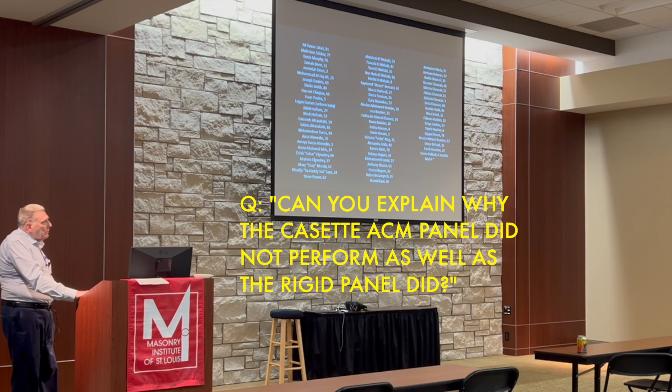Two different panel systems, and why that was such a non-compliant situation as opposed to the pinned or bolted version -- I think it's mainly because there's more exposed polyethylene, because you've got all the folds and much more area. And the other thing is you've got that pan at the bottom, right?

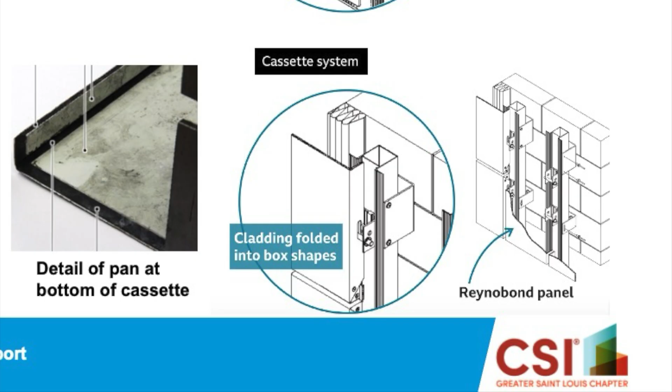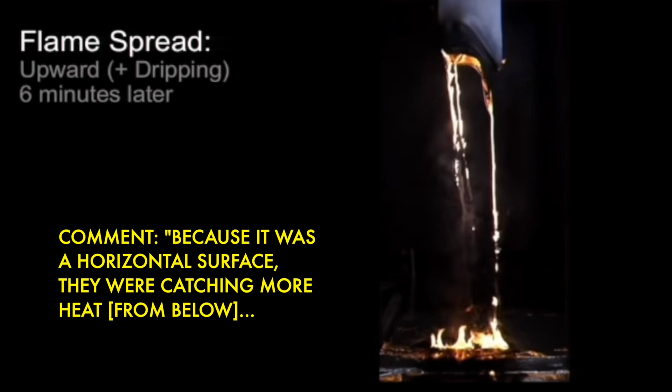I mean, you saw the not-scientific test demonstration. That had to have been. Those horizontal surfaces had a double whammy -- because it's a horizontal surface, they get hit with more heat, and they were catching the dripping materials, so they were actually containing some of it at the same time.

George, you didn't mention it, but HVAC -- was this a unit where the ductwork helped spread the smoke, or do you know? So under stay-put, the central core is pressurized in the event of a fire, right? Because you want to push the flame in.

The elevator, right. And actually they had converted that so the ventilation air and the air used in the event of a fire is the same system -- they just reversed the fan. Some of that didn't work. There still were punch-list things that needed to be done. So that did, in some cases, spread the smoke.

So to the best of your knowledge, no smoke dampers, fire dampers, smoke dampers, suppression systems, sprinklers? No sprinklers, never any sprinklers. There really, under stay-put, there is no fire alarm system. Now, they added individual units within each of the apartments, and in fact that's what woke up the tenant in the first apartment.

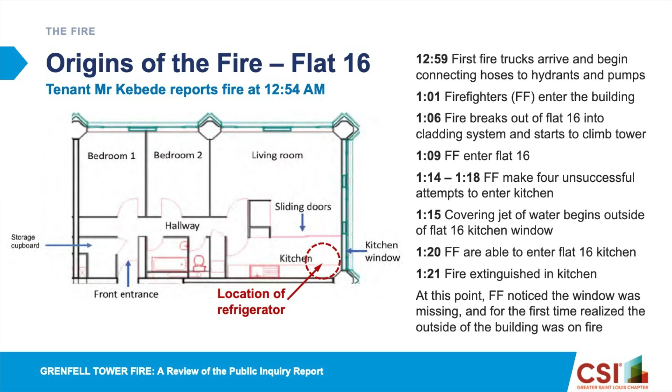But it was thought back then that would just confuse people -- 'I have a fire on the fifth floor, you're on the twelfth floor, I don't want to wake you up, we have this under control.' And in fact that system worked, right, but it was dependent on keeping things like fire doors and ventilation systems functioning the way they should.

So was non-review part of the concern, or is that still being discovered -- whether somebody approved something that shouldn't have been approved? There were approvals, but the competency of some of the people looking at the submittals, or making the submittals, wasn't what it should have been.

I don't know that any of that necessarily contributed, other than I can think of some discussion with the fire breaks, where they really didn't understand that they needed to go at every floor.

And she said design-build, so is that like the US design-build where the architects and engineers work for the contractor? Right, yeah. And you know, the contractor Rydon really didn't understand what it took to be a design-build contractor anyway, because they had never done it.

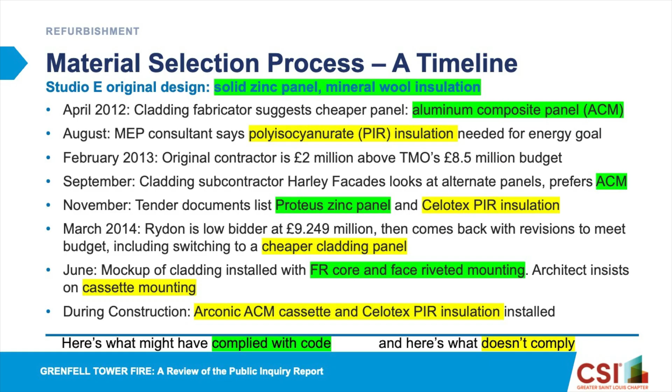So I thought the FR core got value-engineered out in the process. It was in there at some point, and that's probably the one you're talking about, because you're right -- on that one slide with all the changes, it was put in. In fact, they used the FR core in the mock-up, and the architect, concerned about what it looks like and the color and that it's face-fastened, had no clue that it was FR as opposed to PE. That actually blew me away.

I'm sorry, you had a question? No? Anyone else? Good job, thank you -- you guys are being easy. Yeah.